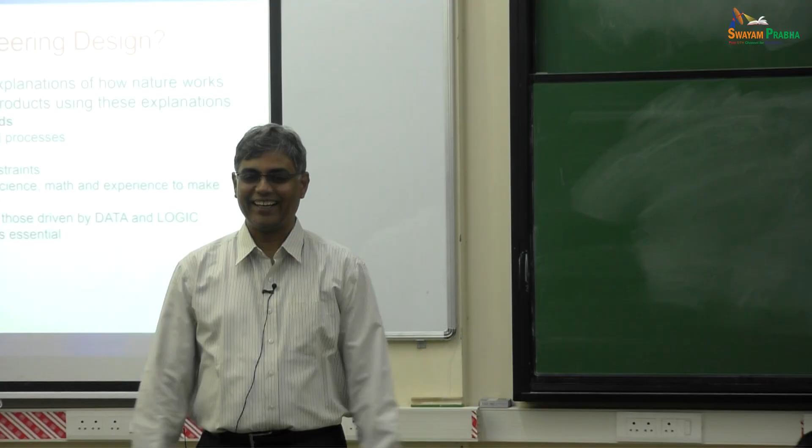So I give this talk in one of my first classes in engineering. I won't spend as much time as I would there, but basically, if you look at all the knowledge that we get, there's something called Bloom's taxonomy. Very interesting. It's a classification of all the things that we know, the quality of the things we know. At the very bottom, we just recall stuff. 3 2s are 6, 3 3s are 9, those sort of stuff which you do in LKG.

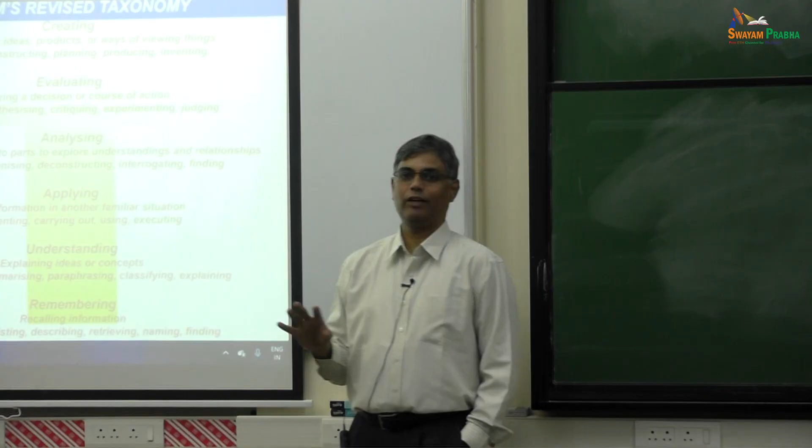But then slowly we talk about understanding, which I already told you. I expressed some doubts about what that word means. But at least in this case, it's explaining to somebody else such that they can also do the same thing. So don't worry about the philosophical meaning of understanding, but at least being able to tell somebody else what it means such that they can also do the same thing.

Then applying in a slightly unrelated fashion. So you know 3 2s are 6, but when you have 3 bags with 2 chocolates in each, being able to apply it and get the total number of chocolates is the next level of understanding or the knowledge that you have. So these are all the bottom of the pyramid. These are the foundations of how you learn stuff.

But eventually, we want to get to these higher order knowledge, which is analyzing. Okay. So if something did not work, okay. So 3 2s are 6 and 2 3s are 6. Why? So that's a little bit higher order analysis. It's just not your multiplication tables anymore. Trying to analyze why it has to come out right. So it's a higher order skill.

Then finally, the last two are what we try to train our engineering students to do, which is evaluating something. Is this good? Is it a good design or not? It's a very higher order skill. It's not that easy to do so. That means you have to be able to critique it in a very constructive fashion. You can't just say, that's wrong, that's bad. You should say why it's bad. You should be able to come up with that.

So literally speaking, these are the two skills that are really the most important. Maybe ChatGPT will not replace these. Okay. Everything else, already the internet is taking care of a lot of this stuff, and maybe ChatGPT is doing a little bit better. GPT-4 is doing a bit better there. Okay. So this evaluating and creating. So this is where design comes in. So I just wanted to give you a feel for that. Okay. So going forward,

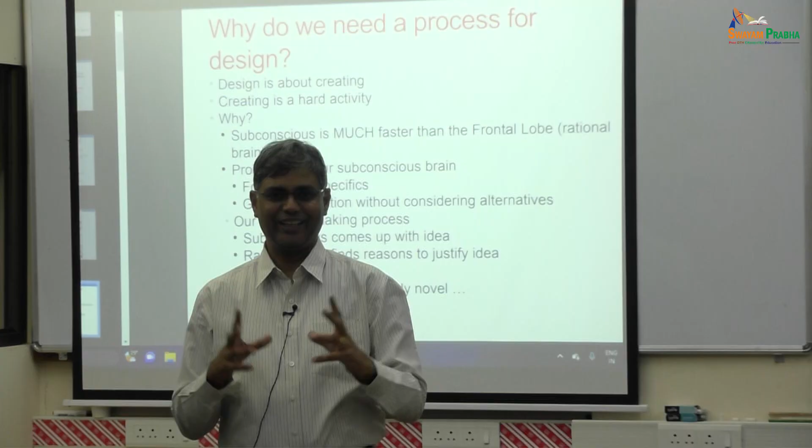What does that mean? I know you all raised some questions. What does innovative mean? Is it just better? Is it just different? We'll answer that question also. So I'm not shying away from an answer. But design is about creating. Any design you do, you are creating something. It's creating, and creating is very difficult to do. Okay, why? It's a very interesting answer.

By the way, these slides are actually from discussions with one of my colleagues, Professor Arun Srinivasa. He's a professor at Texas A&M, a good friend of mine. So we have discussions where I challenge him saying this is bullshit. I also keep telling him the same thing. He keeps telling me. We enjoy our get-togethers, 5 hours of butting heads. We keep fighting about everything. Anything he says, I'll say, no, that's wrong. And then anything I say, he'll say. So anyway, these are his slides. I have to acknowledge them. Okay. They were there in the beginning of the slides, but I forgot to mention.

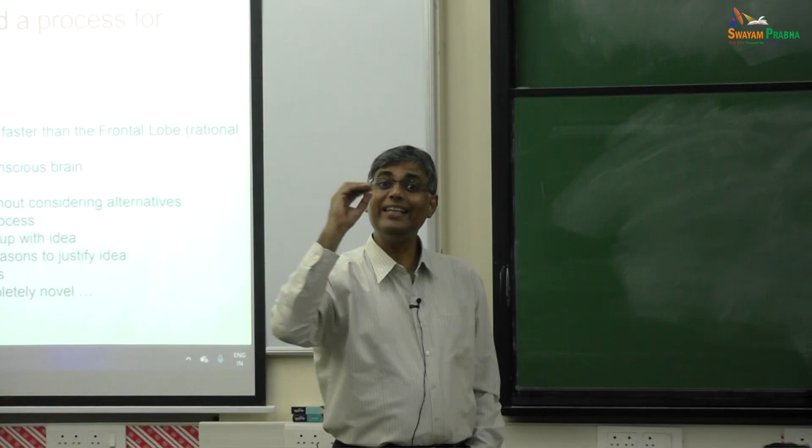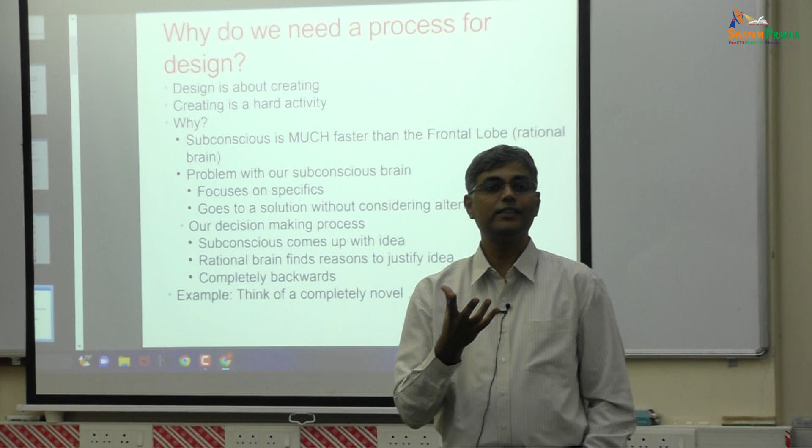So why is creation very difficult? Creating something new, why is it very difficult? Okay. So now we will slowly get to that. So what happens is, all humans, all of us, over the years of evolution, we have this fight or flight response. You've all heard of it. If you hear a rustling in a bush beside you, 50,000 years ago, you and your cave person friend had your clubs and you're going for your next lunch, right? And then you hear this rustling in the bushes beside you. You have to immediately decide whether that is going to be your lunch or you are going to be its lunch.

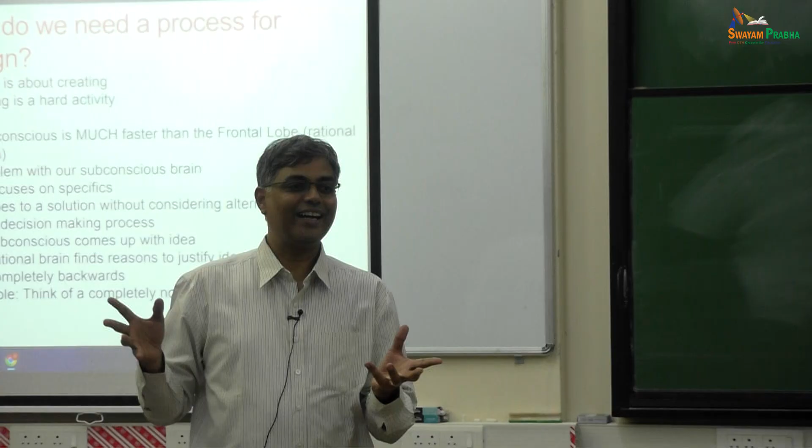So because of that, this fight or flight response, our subconscious, these prejudices we talk about, it's all well developed. In order for us to make the decision at a moment, I can't sit and calculate, oh, the frequency of the sound is this, therefore it could be an alligator. No, I can't do that. I just gotta run, or I have to take my club and start beating that bush, right?

One of those two. So what happens is, because of that, we process all the information that we get into some small brackets. We try to process it, and that's how we operate. Even now, even if you don't have that fight or flight response, everything we do is still based on that. That's how we are. We don't have to fight it, but we have to recognize it.

Okay. So first of all, there's a subconscious brain that makes our decisions. It always makes the decisions. So supposing we are all going for some lunch to a restaurant. I say, what do you want to eat? You look at the menu and immediately you'll say, I want puri. Then I'll ask you, why did you choose puri? Then you will come up with some nice reasons.

Like the reason is, last several times I ate upma or some dosa, so now I feel like some difference. So you'll make up a nice story post facto. But actually the decision was made instantaneously in your brain, like that.

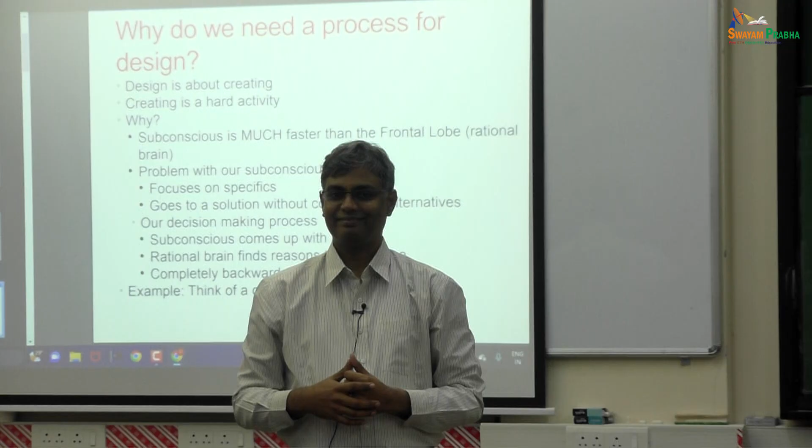So what happens if I ask you to make a novel, innovative pencil? All of you, I hope, have a picture of a novel, innovative pencil in your mind. How does it look? Anybody? Just switch on the mic, please. Pencil is not a big deal, right? All of you know pencils. But I want a novel, innovative pencil. So you should have a picture. I want you to tell me what you think it is.

So he's starting to put his head out there. A normal pencil, I'll just write novel and innovative on it. No, I don't want a normal pencil. Yeah, I'll write novel and innovative on it. Oh, you'll just write it. Okay, fine, no problem. That's good. Off the beaten track. I like such answers. Good. Yes, please.

It's connected to my mind, so it can write whatever I think. Excellent. So it's a pencil where you don't have to use your hands, but it will still write, connected by thought. Very nice. The lead should be color changing. Beautiful. Did anybody else think of it? You also thought of it? Very nice. Like a self-sharpening pencil. Excellent. So I'm getting lots of ideas.

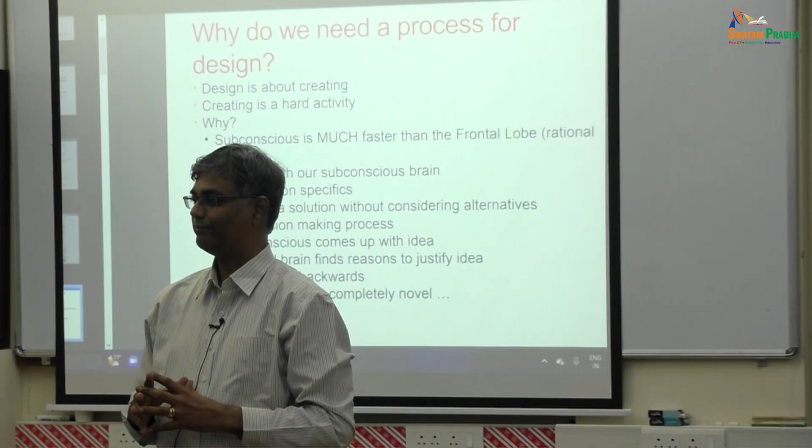It already has a pencil. On top of that, now you're putting some new bell, whistle and so on, trying to make it novel. Okay, that is what we do. That's how our brain operates. Okay, if you really want to be innovative, we have to go back and ask some of these questions.

What makes a pencil a pencil? Why? What is this? So you should ask the customer. So here you didn't ask the customer, what is innovative? What do you mean by innovative? You didn't even ask. You just came up with something that is flying around. I don't want something that's flying around. It costs a lot of money. I don't want it, right?

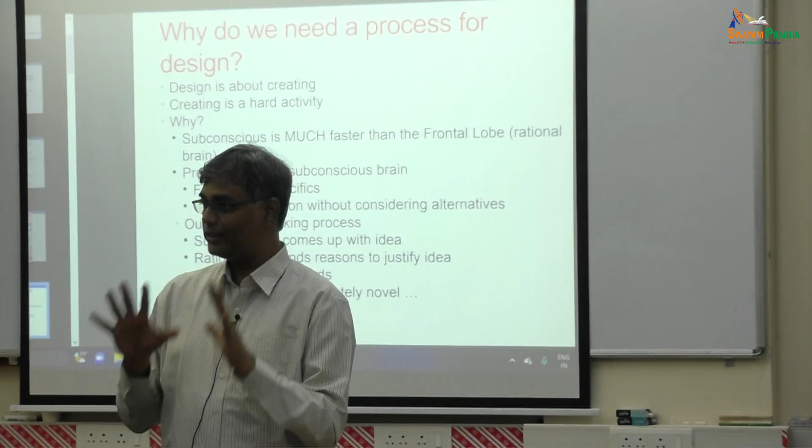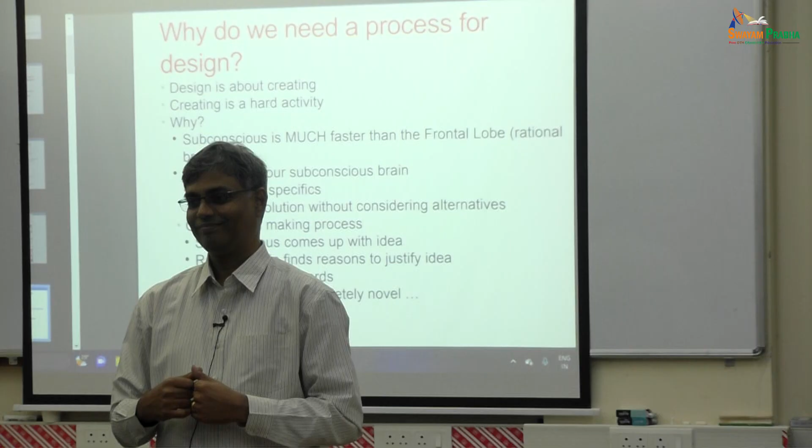So the point here is, we should recognize that our subconscious will come up with a solution. I'm not denying that. Let's use it, but let's also try to make sure you're completing the design loop by engaging with the customer and finding out what they really want. That part will help us go back. So what is this novel?

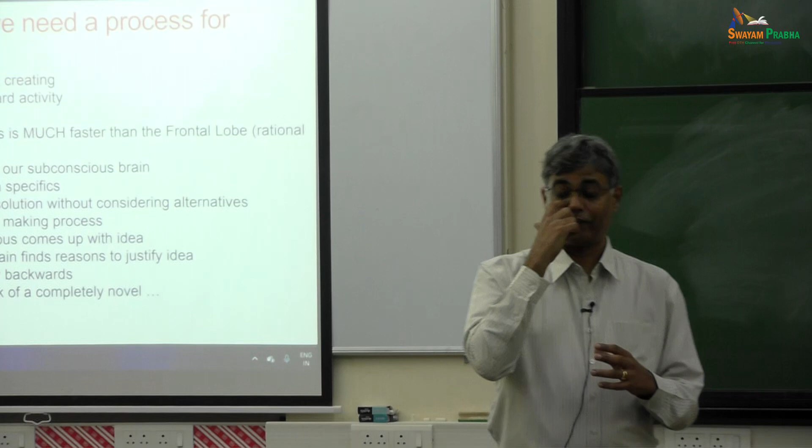So for example, I give a more humorous example from my friend Professor Arun, who comes from the US, so they have lawnmowers in the US. How do you come up with an innovative, novel lawnmower? One person will say it should be a hovercraft. One person will say I should be able to sit there and guide it on my pad or phone, or I should just switch it on like a Roomba. They'll give all these suggestions.

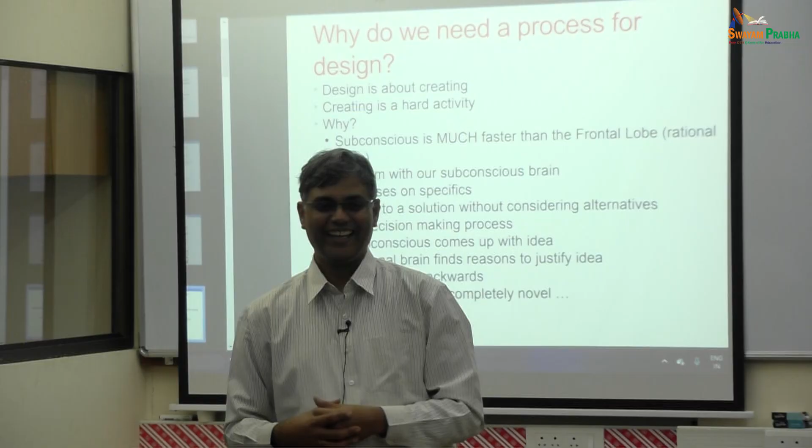Finally, my friend says the one he had in mind was a herd of goats. Because novel in his case was he wanted an environmentally friendly lawnmower. So what is the most environmentally friendly lawnmower? A herd of goats, right? That's the sort of thing you would never think of. You'll just think of only the lawnmower and add more bells and whistles to it. So this is how we go through this careful process of design.

So I'll just go forward. We have the subconscious brain, and then we have this additional model-making brain which comes in afterwards and tells us, oh, I have this nice model about why I wanted to eat puri today, not any other thing, right? I just wanted to leave you with a few more things about what it is, and then we'll go towards mechanics.

So design will have several aspects to it. I am particularly one who focuses on mechanical aspects of design, like how do you build structures. So I'm going to spend some time talking about those aspects. But before that, keep in mind, this is the point I was trying to make from the beginning: design is not about something; it is about a customer and what they want. So it's people oriented.

It represents a way of thinking, and it can be applied to anything. That's why I asked you about preparation for a vacation. How do you plan a vacation? There you have to find out who your customers are. Your sister wants something, your dad wants something, your mother wants something, and if you want to plan something, you have to find out what they want. So what is their want and need?

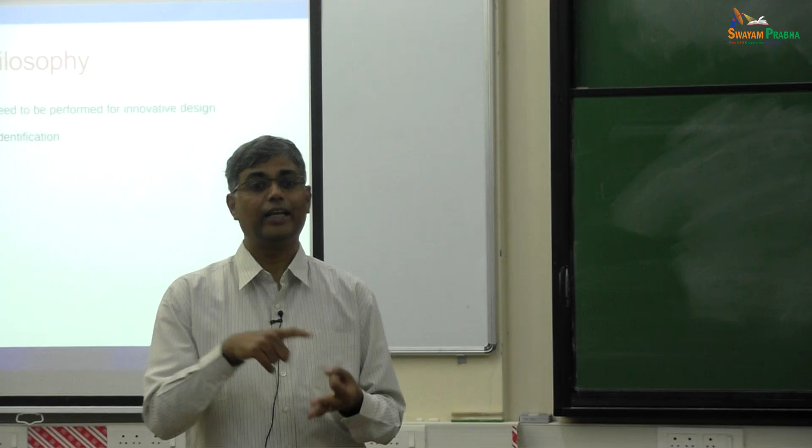It turns out there's always a question: can I do it faster? Can I do it cheaper? Can I do it more safely? Can I build the same 10-story building in 6 months instead of 1.5 years? Can I do it cheaper? Why do we want cheaper? We are hoping that more people can access it. Suppose you make a cheaper aeroplane, then there could be more flights, and more people can travel to meet their friends and family, right? So there's always a drive towards making things better.

So now it turns out that materials are used in different environments. For example, if you take the table, its environment is relatively benign. It will always be within a 20-degree range in temperature. The kind of loads it's going to bear is also relatively well known. And it's also not critical; if both of us decide to sit on it and it breaks, at the most we'll knock our heads on the ground. So we see such non-critical use of materials.

And then you will start seeing materials which are critical, but in normal usages, for example, the bumper of your car. You have to design it better and better, such that right now if a 30 kilometers per hour accident happens, nothing happens. Even at 80 kilometers per hour, maybe nothing happens. Can you design that? Those are questions. But the operating conditions are relatively benign. It's the same temperature and you know the load, what force is going to act.

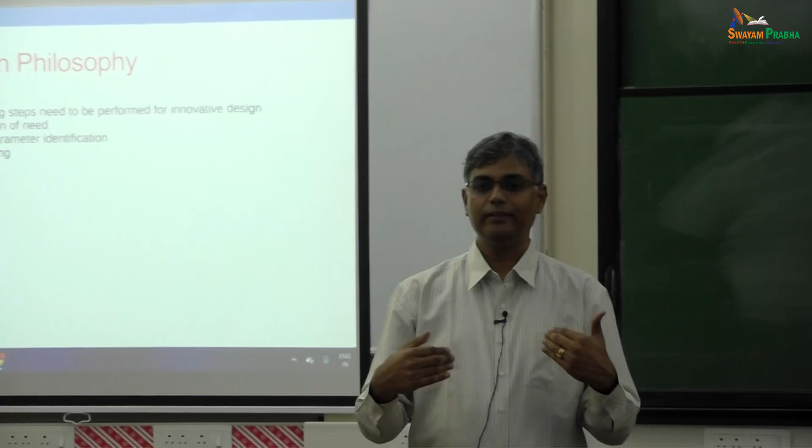Okay. So this is the broad outline of the topics which I work in. Try to see if I can design better materials or understand material behavior such that it can operate at more extreme conditions, or at least what are the aspects that are important.

So generally the way it works is in a university setting, we try to ask questions at a little bit more fundamental level. Even if you are in engineering, I don't go and look at a particular alloy of steel or anything like that. I'll say what aspect of that alloy is going to make it not fail at higher temperatures.

Then the industry will actually go say, oh, this person said if you add small particles of carbides, then it'll improve strength at higher temperature. So let me see if I can make it. So there will be people who will take up such ideas from here and go. So I would say even in a university setting, we are still asking a little bit more fundamental questions and asking how things can be done, more fundamentally.

Okay. So my own interest is trying to understand exactly what I told you about this material behavior in more extreme environments. So what happens is, if you took any material whatsoever, it has something called a microstructure. If you look at your tables in front of you, you'll see there's a wood microstructure. Do you see that? So basically you see wood.

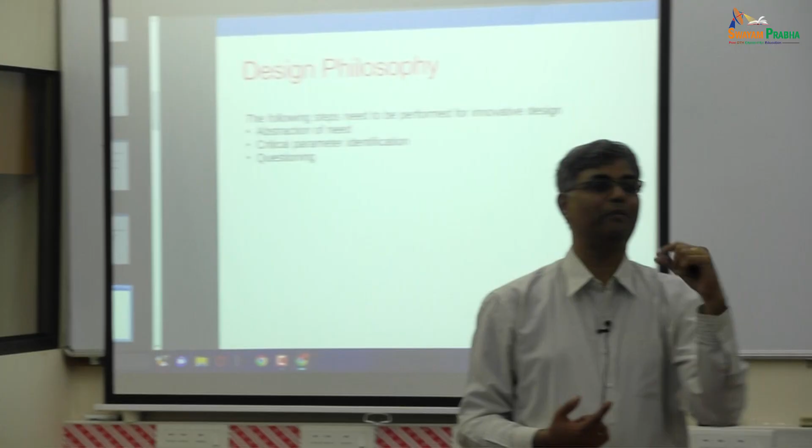So then you'll ask, if things are changing, how come we still consider flying quite safe? What we do as engineers is we over design everything. So even though your turbine blade could be only a few centimeters thick in the wall, we'll make it twice as thick, just to make sure there is no danger of any failure and crack. But that has lots of consequence in the cost. So if I'm able to understand how things are happening better, I can make it only 1.5 times as thick, and all that saving of material will be very useful.

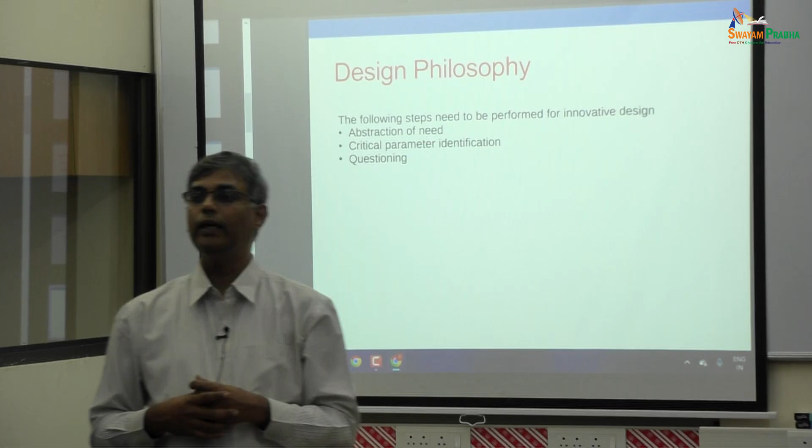So any questions about what I've talked about so far? This is a very broad outline of the kind of things that keeps me excited in my research. So then how do we solve such problems? Again, I want to emphasize all the maths, physics, chemistry that you're learning right now, I still use it in trying to solve this. The same equations that you're learning in school physics, I'm using now and teaching to my PhD students. Then what is different?

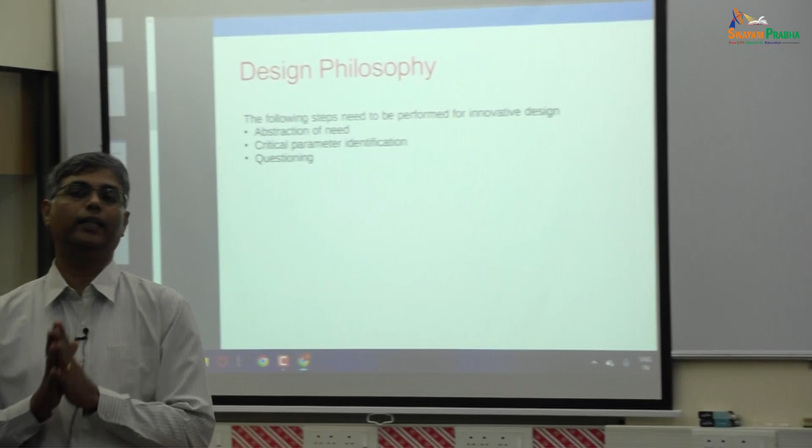See, the thing is, lots of times if we know why we are going to learn it, where it's going to be applied, it helps us position our ideas a little bit better. I'm always a big proponent of the big picture. Okay. So if somehow we know all the stuff we're going to learn, how we are going to apply it later, I feel like we get a much better understanding of what we're doing. So,

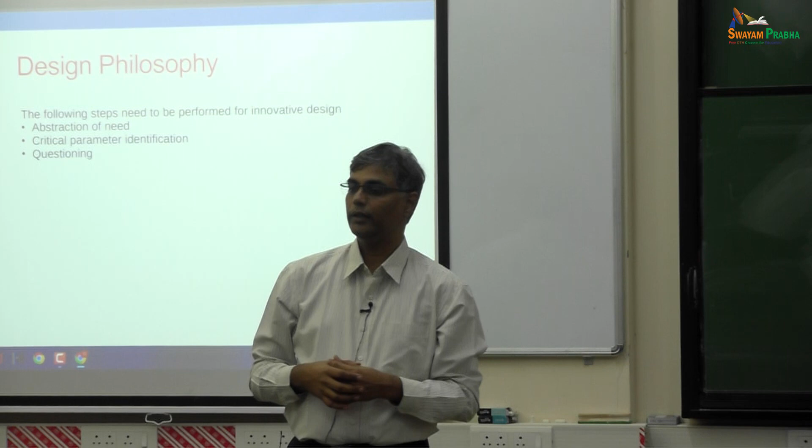and I hope at the end of it also you will get a feel for what are the considerations that go into, say, various aspects of failure of materials and so on. This is a very interesting topic just by itself also. So how do we solve such problems? How do we even design and solve such problems is the question. So as I was telling you, we use actually school physics.

Okay. So let's try to actually start solving some problems. First we'll start with trying to design a leg of a table, for example. So in this process, I hope you will pick up lots of very interesting aspects of material behavior, which will stay with you for quite long, and it will use concepts that you already learned in school.

I'm not going to teach new concepts actually. You've all done springs, I hope. Even if you've not, I can teach you. It's very easy. We'll only use springs to do all our calculations going forward. Okay. So yeah, question? Any questions? Okay. So basically, let us first get a feel for some numbers. Okay. So

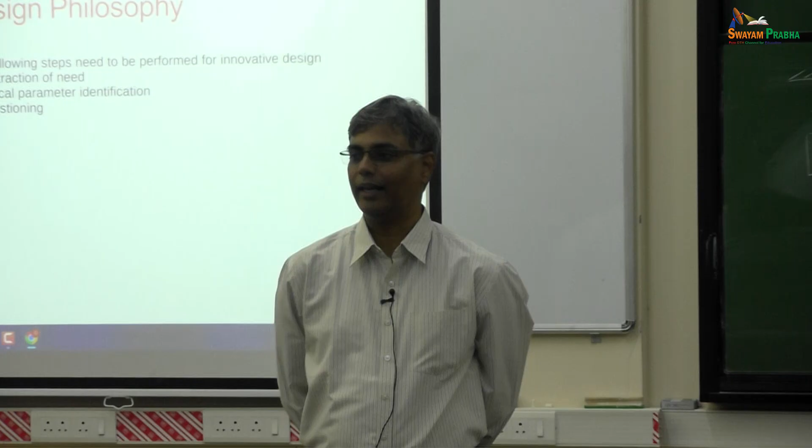So to take into account the redistribution of the force that takes place. There's a redistribution of the force and you want to account for that. Yeah, there could be redistribution, but at the end of the day, it's still, okay. Fine, let's come to it. Anybody, any other answers? You want to switch on the mic?

So let's say a bullet has a certain force, and because it's a bullet, there's a small area of impact, right? So that might even kill you. But let's say I take a large surface area and apply the same force on you, it'll just push you. So the effect of the force is different depending on the area. Depends on the area. Correct. So I think all of you have it. We'll discuss that also.

So it turns out the concept of stress is important in materials. First in school we are introduced to forces which work on either point objects or rigid bodies. So I might have a rigid pen and apply a force on it, and you can do the mechanics. You can write F = ma and T = I alpha, and calculate the acceleration and alpha based on that, correct? Those are rigid body mechanics or particle based mechanics, which is what you've done.

But in engineering in real life, we work with extended bodies. There are no point bodies or rigid bodies. So in order for us to understand the behavior of a material, we have to first do some experiments on the material. Okay. So all of you know Hooke's law? Yes. So what experiment did Hooke do? Do you know?

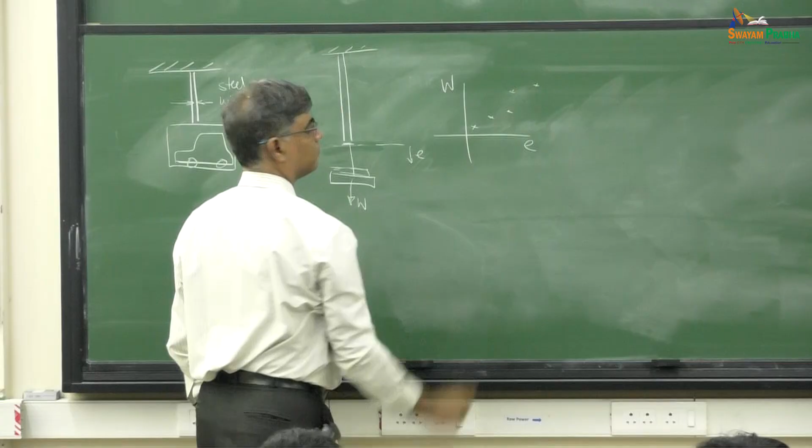Put one weight, one plate, got some extension. Put one more plate, got some more extension, like that. That's the first basic experiment you can do with any material. Okay, we'll come to it now. This is in terms of force. This is in terms of extension only. So far, no stress, no strain, nothing.

This is what Hooke did, and this is what he presented. In fact, there's a very interesting story associated with it. In Europe at the time, slowly the scientific method was coming out, but there was also a lot of stealing of other people's ideas. A lot of fraud and stealing of ideas was there, very rampant. So when Hooke got this idea of linear extension, he was so excited about it, but he did not want to tell anybody because he said somebody will steal my idea and say, oh, I already know it. So what he wrote is his law.

He wrote it in Latin, and the law is written as ut tensio sic vis. So this is a Latin law. Ut tensio, as the tension, as the force, so much the vis, the extension. So as the force, so much is the extension. But he didn't want to publish it. If he publishes it, then people will steal it. He was really worried about it.

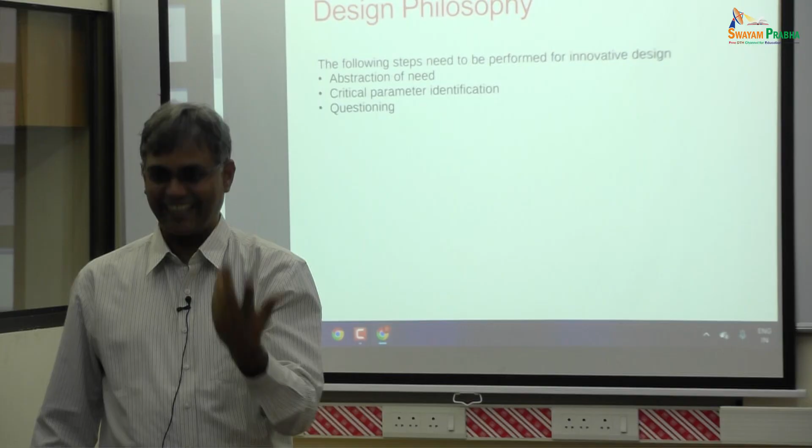So people were so afraid of credit being stolen. In fact, if you really look at it, in engineering and physics, whatever we attribute to one person, we'll say Bernoulli's theorem, it'll be done by somebody else, D'Alembert's law, it'll be done by somebody else. Things are all crazy actually. I think engineers and scientists are not good at history, and also there was rampant fraud and stealing. If you really look at it, it actually boggles the mind. I'll give you an example in the same context.

The solution of a quadratic equation, ax squared plus bx plus c, has been known for a long time. There's a guy called Tartaglia who came up with the solution of a cubic equation, ax cubed plus bx squared plus cx plus d equals 0. Very interestingly, he kept writing out specific cubic equations, like x cubed plus 121x plus 376 equals 0, and he'd write letters to various mathematicians: solve this. They didn't have a general method. They'd have to keep substituting, get an answer and send it to him. He'd say, yes, correct, here, solve one more problem.

So he kept giving example problems, irritating all the mathematicians at that time, because he knew the general method and nobody else did. Eventually everybody recognized this guy knows the general method. They were upset with him, but they kept asking him, tell us. He said, no, this is my method, I'll keep it to myself. Then there was a guy called Cardano. He goes to Tartaglia and doesn't talk about the cubic equation at all. He just becomes a friend. Oh, Tartaglia, you're a great guy. He talks about this, that. For 1.5 years, just a friend.

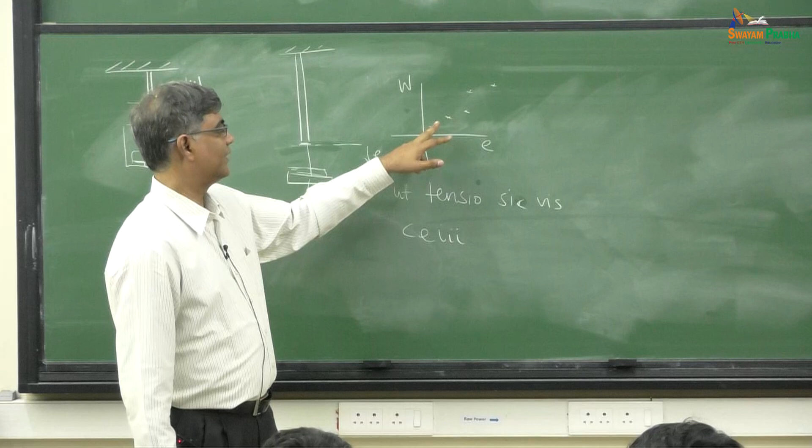Now, if you really look at it, the first thing I want you to notice, I put these points, I hope you saw it's not a straight line. So never expect anything really like a perfect straight line in experiments, okay?

Somebody gives you a nice straight line, like, hey, bogus, this guy is going to sell me some lottery ticket which is never going to win, right? So you should be very clear about it. And of course, you know that there will be one at 0, 0, because if you don't apply any load, that's where you're measuring from, okay? So the point is, it sort of looks like a straight line. So Robert Hooke, when he did this experiment, was very happy.

Now, supposing I ask the question, I take two similar wires side by side, and I apply the same load, I do the same process to it. If I take two similar wires side by side and I distribute the load to each of them, how will the W versus E curve look for this new case? So are we maintaining the total thickness to be the same? No, two similar wires. So if I had a thickness T in one case and the same T in another case, so I've doubled the thickness, what will happen?

For the same load, I'll only get half the displacement, because each wire is only going to experience half. So in other words, just from thought experiment, we don't even need to do the experiment again. We can always test it again. From thought experiment, I hope all of you are convinced that we will get a curve that will be, sorry, did I draw it wrong? I have to do twice the W to get the same extension. In order to get the same extension, I have to put 2W because each wire has to be pulled by W.

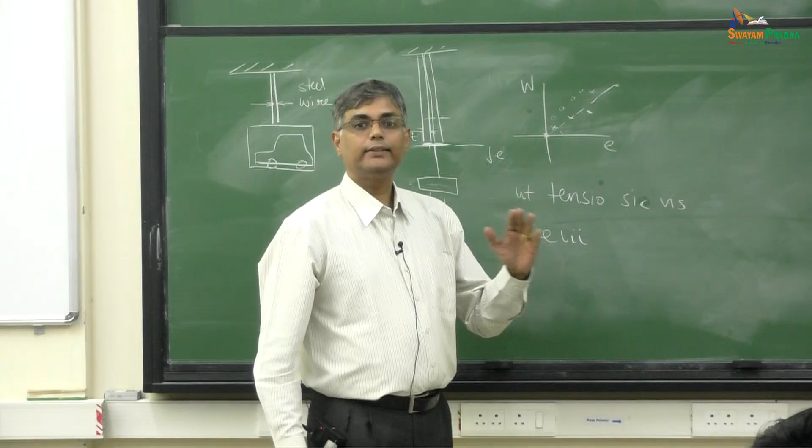Okay? So like this, every wire you give me, if you give me 3 times the thickness, it will be a different wire, different load versus displacement graph. So that is why, what I will do is, I will actually plot W by the area. If I plot W by the area, then even if I double the area, it will still fall on the same graph. You understand? So this is the origin of the concept of stress. That is, I can do load versus displacement, no problem at all. That is only the fundamental.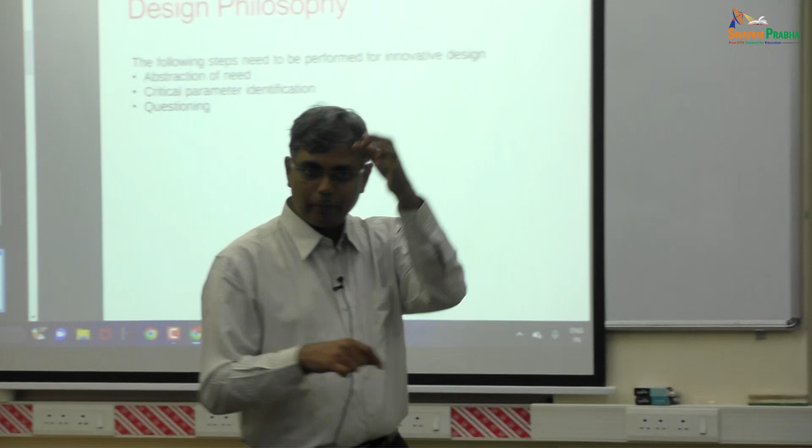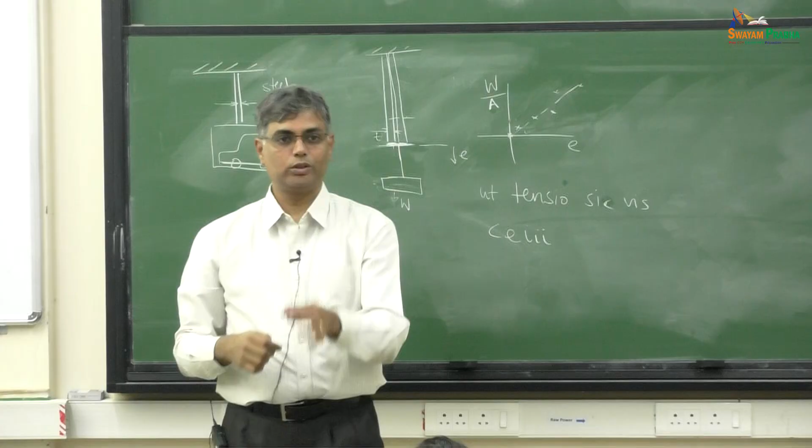But each time you give me a different thickness of wire, I'll get a different graph, because I can imagine each wire to be composed of many thin elements, each of which is supporting some part of the load. Understood? So that is why we get W by area. Then I will not get many graphs. I'll only get one graph. Whether I choose area equal to 2 square centimeters or 4 square centimeters or 3.5 square centimeters, I'll get the same thing. Understood? Now, please stop me if you don't understand. It's just a question of parallel springs, almost. Think about it like that.

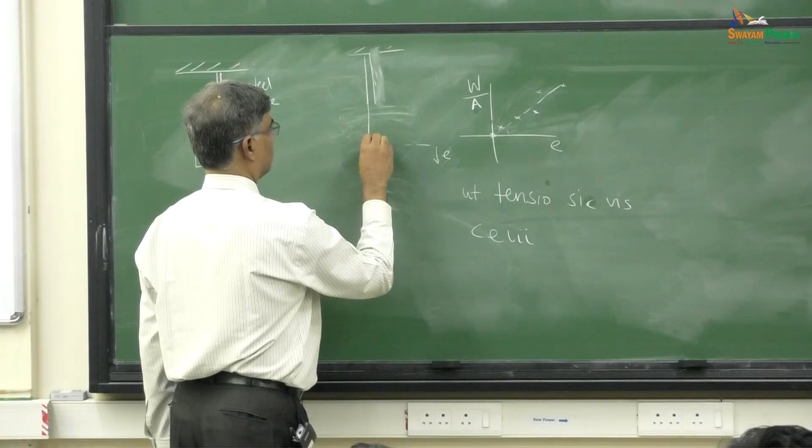Similarly, one more thought experiment. I make the same area, but I make it twice the length, let us say. So I attach 2 springs in series. Then what will happen is, if I apply a load W, this will extend by delta, that will also extend delta. So same W will cause 2 delta extension. Right? Yeah, question? No question?

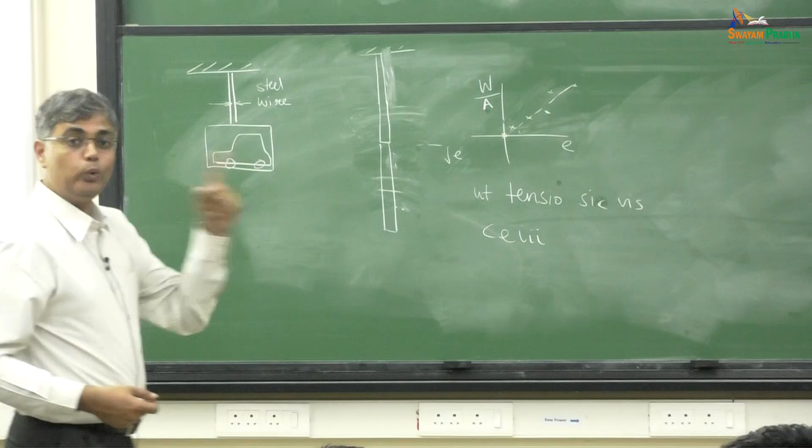Okay. So basically, by thought experiment, we can find out that you will get one universal curve for this material if I just consider the load by the area and the extension divided by the length. So now it does not matter how fat; you can be working with a big thick steel bar or a thin steel bar, we will get exactly the same curve. Which, by the way, all of you recognize. I am just explaining it in a slightly different fashion. Keep this in mind. Any questions? So this we call stress and this we call strain, and we have a curve that looks like this.

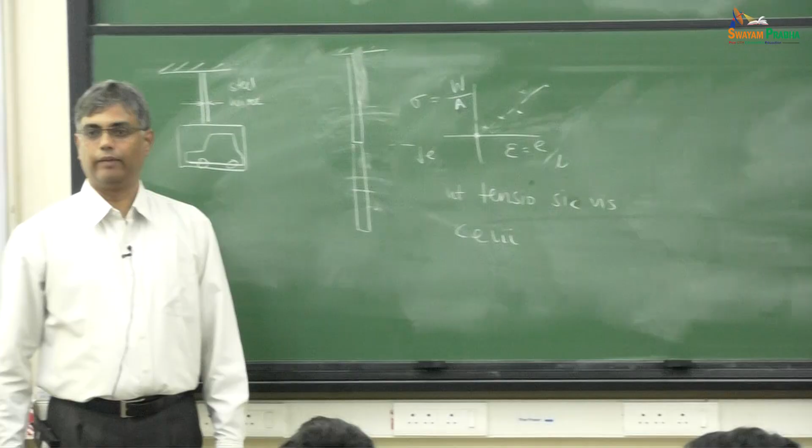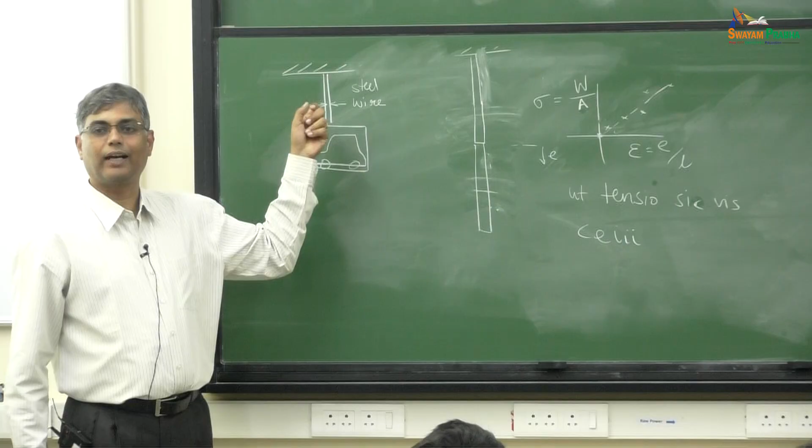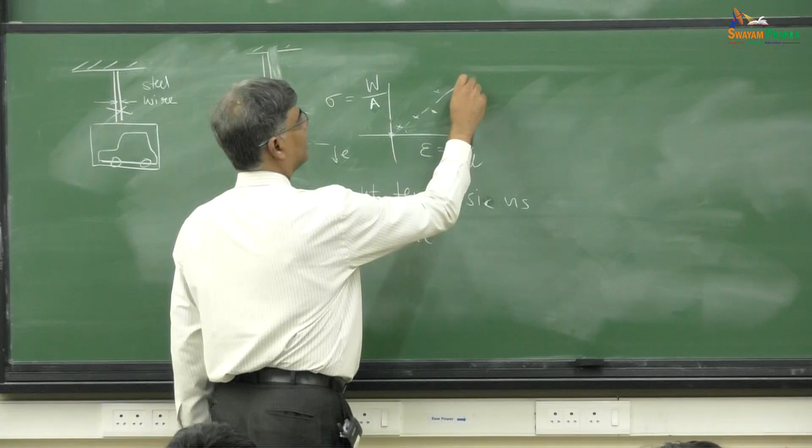But when I am hanging my car from the ceiling, what is my consideration? I don't want this to break and fall with a thud. So what I am looking for is the breaking point. At what point is the breaking stress, breaking load? So we talk about a breaking stress. Sorry? The fracture point. So if I take a thread and keep pulling it, at what point does the thread actually break?